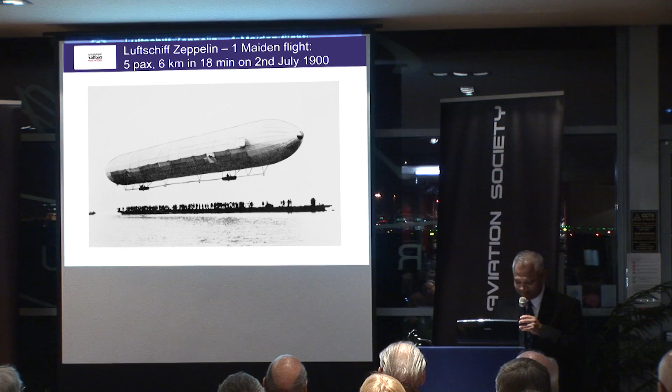Ladies and gentlemen, it's 11 decades of commercial air transport in 2 minutes. Started with airships, which came and went. Biplane airliners came and went. Flying boats came and went. Piston props came and went. Turboprops came, and they have gone for long distance transport, but we still use them for commuting purposes. Turbojets came and went. The idea is why not use the best features of a turbojet with a shrouded propeller, a turbofan, and that gave birth to the fan jets.

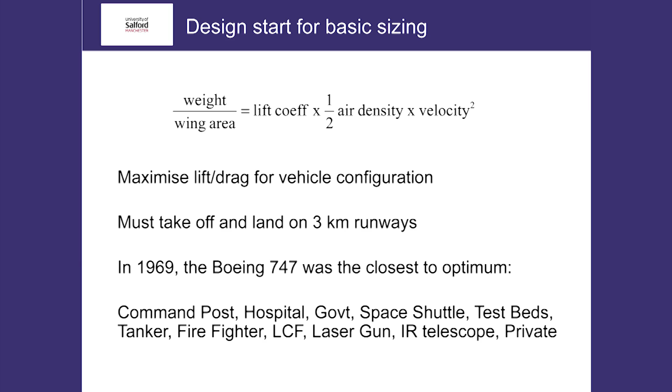So what exactly is the problem? The bigger the plane, the flimsier it becomes, the more it bends and twists. So we have structural distortion problems. By the time I entered the scene, we started using computers to control the aircraft, and by relaxing the stability, you could get better cruise efficiency.

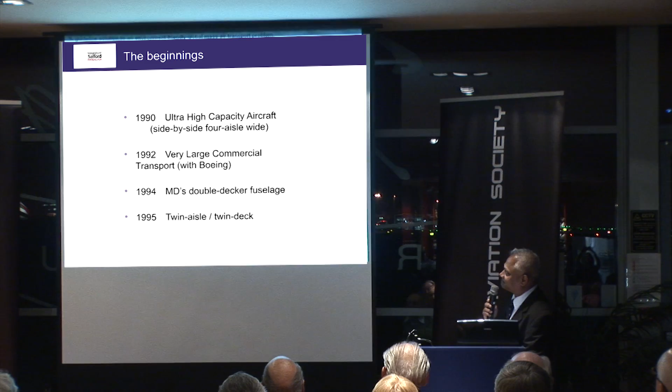When I returned to the university, mainly for my own benefit, I set some classroom exercises so that the students would be able to try and get the best of both worlds, use new materials, and come up with something most efficient for a global transportation system. Now don't worry too much about the next slide, but this is the actual solution to that problem. What's interesting is the last set of numbers the students came up with, if they did the sums right, those numbers are remarkably close to what eventually became the Airbus A380. Very, very close.

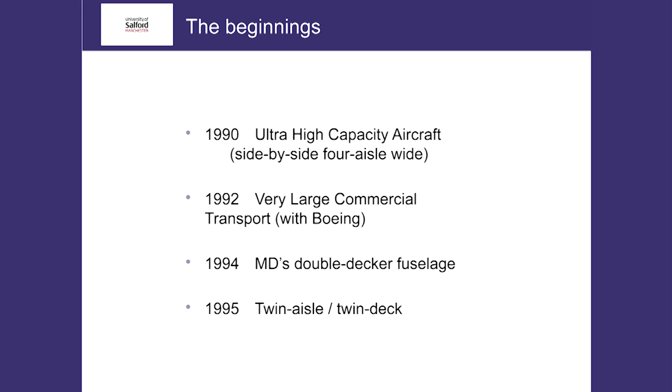So what were Airbus doing at that time? Well, in 1990, I did not know this at the time, but they were actually working on this project. Now, Airbus and Boeing will claim that they do not know each other. Don't you believe them? They did have an affair in 1992, but it didn't last long. In 1994, McDonnell Douglas came up with an aircraft design that looked remarkably like the A380, but unfortunately they went under, which paved the way for Airbus to go it alone.

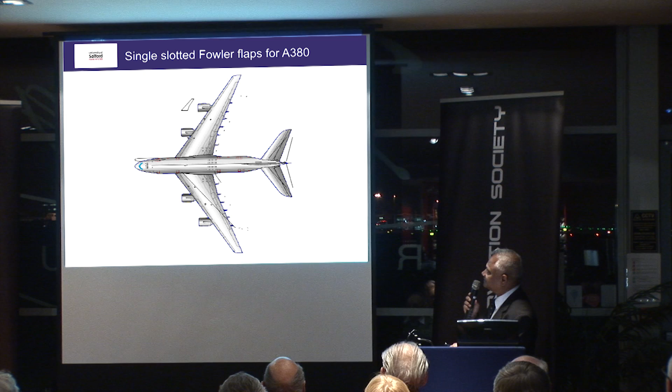So what exactly was the problem? Well, it's the sheer scale of the solutions we are coming up with. The length of the aircraft remained about the same for the given configuration, but it's the wing area - that black line is the outline of a Boeing 747. Its wing area is about 520 square meters. The A380's is about 845 square meters. That's a huge increase, and that was going to bring on an awful lot of flexural problems. The wings were going to bend and twist all over the place. The question is, can you control this using new technologies?

To give another perspective, the root chord of the A380 wing is larger than the length of the single-aisle wing. These are the numbers you see in a shipyard rather than an aircraft factory.

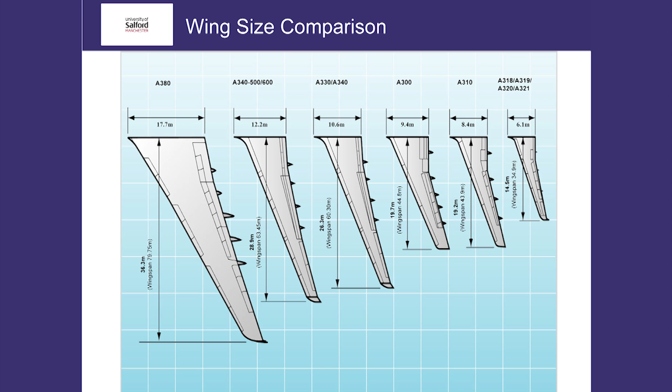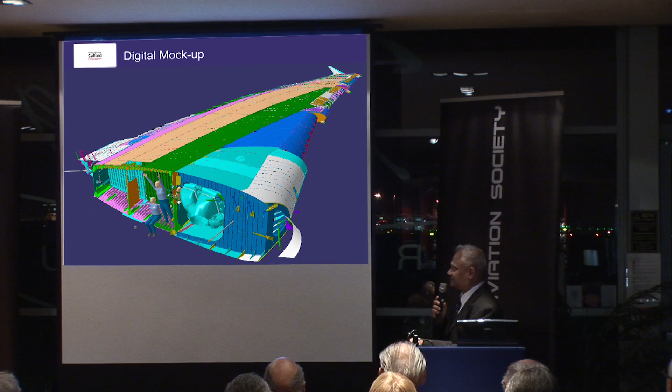Well, a three-dimensional mock-up. When I'm at the Broughton factory, with my height, when I stand at the bottom skin at the root end, I can't reach the upper skin at the thicker section. But of course it quickly thins down as you go along the span. Just for information, the air cycle machines or air conditioning packs are housed in the leading edge of the root section of the wing.

Question is, do we want this particular type of aircraft? The answer was definitely yes. It turns out that regardless of gigantic economic collapses, wars, natural disasters, whatever, world air traffic doubles every 15 years, and we can't go on building new runways and new airports all the time. So the answer was yes, go ahead.

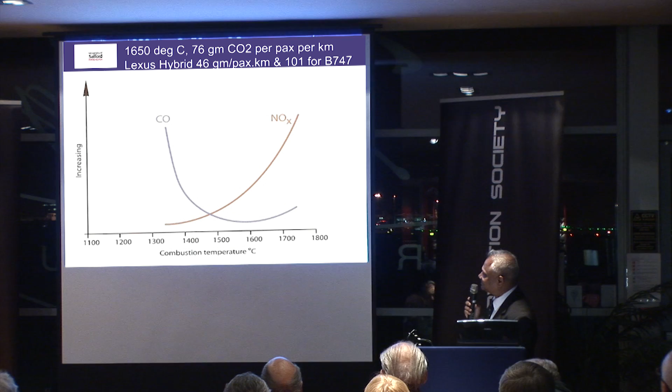We need this aircraft. So there's another problem concerning environmental issues: the combustion temperature. As a general rule, if you burn the kerosene at a low temperature, you run into problems with carbon and carbon monoxide. Nitrogen takes over the problem at higher temperature. For this reason, it was decided to set the burn temperature at about 1650 Celsius, whereby they thought you could get the best of both worlds, and you also had to worry about volatile organic compounds as well.

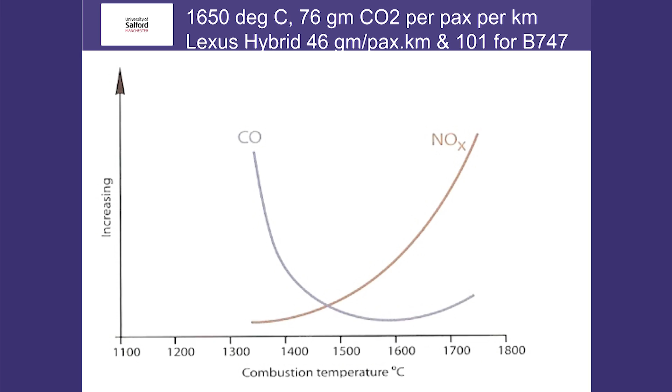Noise: for certification purposes, you place a microphone about 2 kilometers upstream of the touchdown point, another microphone about 6.5 kilometers from the brake release point for takeoff calculations, and a third one about 0.5 kilometer offset from the runway. It's that microphone that will register the greatest noise because the engines are at full throttle.

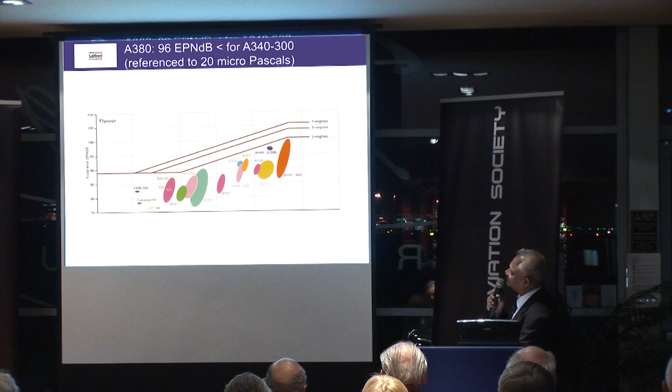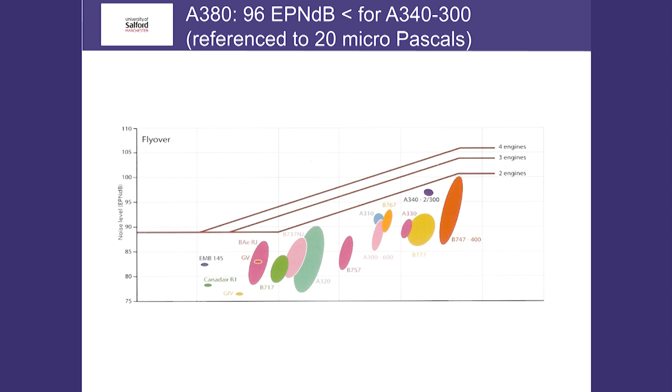If you look at the certification for four-engined aircraft, you're allowed something like 105 decibels. I'm pleased to say that the A380 is a very, very quiet aircraft—it's only 96. EPNdB stands for effective perceived noise in decibels, and we always reference it to 20 micropascal. That's something that's never mentioned when you read the general text.

What about the engine itself? This is a Trent 900. First of all, it's about a third bigger than the RB211, which powers the 747. The Trent 900 is not a Trent engine in the usual sense—the 500, 600, 700, 800 basically share the same aerodynamics. The Trent 900 has swept fan blades; the leading edge is bent, if you like. It's a different set of aerodynamics.

At full tilt, each fan blade's tensile force equates to hanging 90 cars, and the airflow is about 1.2 tons per second. The tips go supersonic, and the high pressure spool rotates in the opposite direction. BPR is bypass ratio: for every kilogram that goes through the combustion chamber, 8.2 kilograms goes around the outside. That's where the majority of the thrust actually comes from.

Overall pressure ratio, just for comparison: those who drive diesel cars, your compression ratio is about 21 or 22 to 1, petrol even lower. This engine's compression ratio is twice that of a diesel car. As for staging, don't worry too much about it, but note this number: the intermediate pressure compressor has 8 stages, and the turbine has a single stage. So that turbine is driving 8 stages of compression at the intermediate shaft level, and the sea level static thrust is about 31 tons.

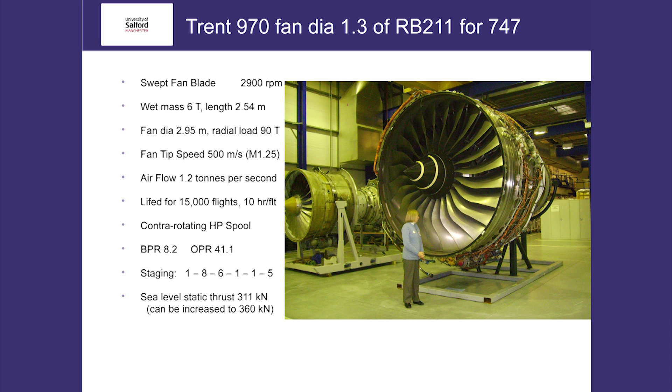By the way, that's my wife standing there. She's seen many of these RB211s—she's a librarian, a cultured lady seated over there. Her first words on seeing the Trent 900 were, 'My God, he's a big bugger.'

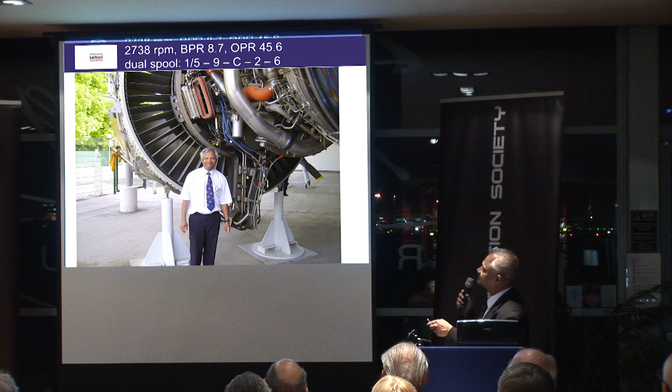The alternative engine is the American engine. It runs slower than the Rolls-Royce engine but works harder. Its bypass ratio and overall pressure ratio are a bit higher, but it's a two-spool engine, and both spools rotate in the opposite direction to the Rolls-Royce fans, because Americans have to be different.

You do as many tests as possible on the ground, but there are certain tests you have to do at altitude and at the right Mach number. For that, the only way is to attach it to an existing aircraft.

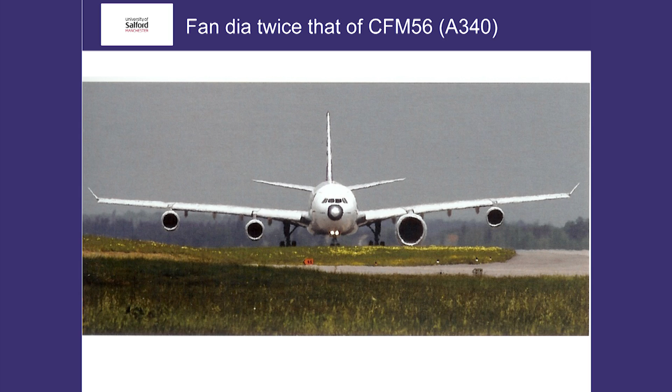The biggest problem here was ground clearance. That engine is about twice the diameter of the CFM56, which powers the A340 test bed. I thought I'd throw that in.

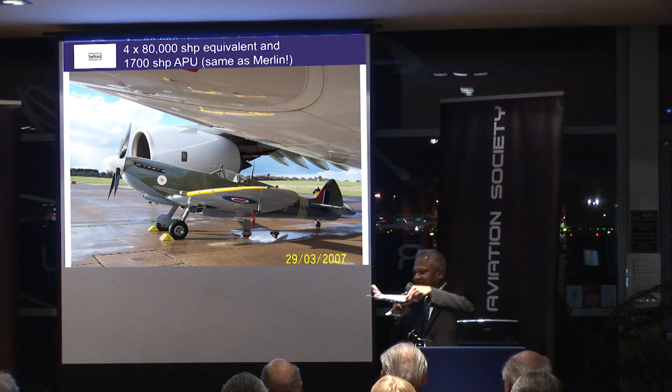In addition to the main engines, which equate to about 80,000 shaft horsepower, at the very back, at the tail cone of the aircraft, you have a fifth engine which is used to run the auxiliaries.

It so happens that the power output of that engine equates to the Merlin engine that powered the four-bladed Spitfire. That is what it takes to keep 440, maybe 500, passengers cool and happy.

New materials: it is predominantly a metallic aircraft, but the whole of the back end is non-metallic, as is the center section of the wing.

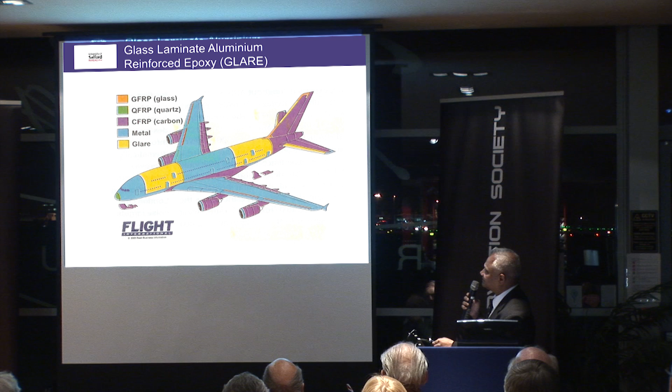The bits in yellow are a combination of the two — a hybrid material made of aluminium sheets pasted onto glass fiber mats. That particular material was developed mainly by Delft University in Holland.

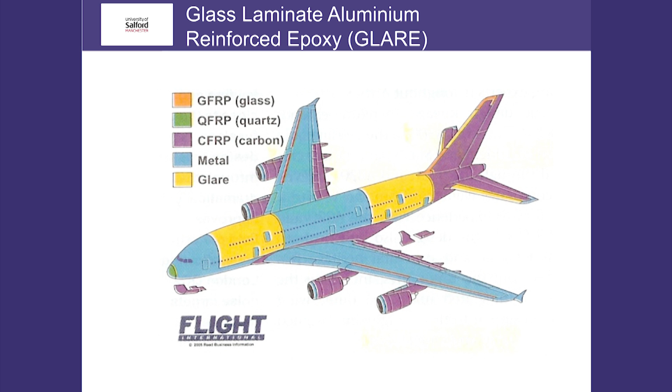We're still not sure whether it's the right thing to do, but hopefully, according to theory, you get the best of both worlds in terms of corrosion prevention, minimum maintenance, adequate strength, and so on.

I had to show this, otherwise my bosses will kill me. These are some of the projects done by my students and colleagues. Lina got a PhD out of structural stressing work. Pirasuth from Thailand, now working for Thai Airways, did a lot of the work on fin and rudder sizing.

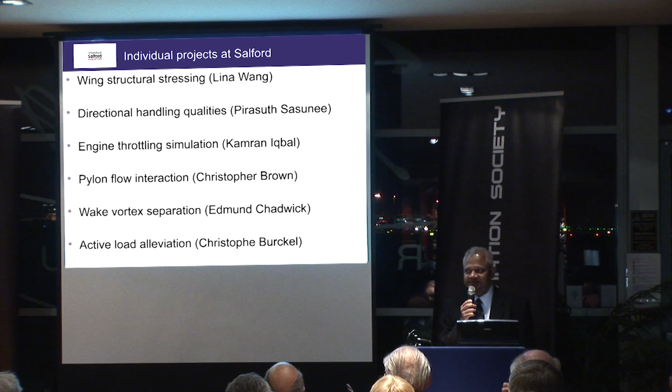That fin is about 25% less than what it was originally, and we had a part to play in that. Engine throttling simulation was done by Kamran.

Kamran is now working on A380 undercarriage systems. Christopher won the Frank Little Trophy doing aerodynamic studies on pylon flow interaction, and he worked for Rolls-Royce after graduation.

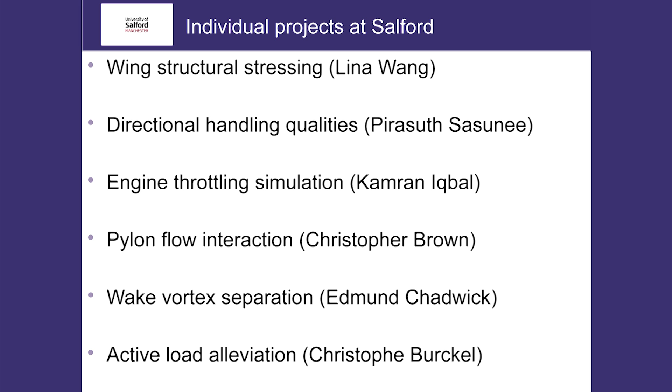One of my colleagues did some work on separation distances, and Christophe from France, very good at mathematics, did some work on feedback control for load alleviation.

The Germans did the asymmetric cases, and when you integrate the whole system, you want to make sure one system doesn't end up fighting the other. So this particular box of tricks makes sure everything is phased in and out instead of jerking the passengers all the time.

Once all that is going on, what you don't want is for the aircraft to get into an unusual mode, so the flight envelope protector keeps an eye on things.

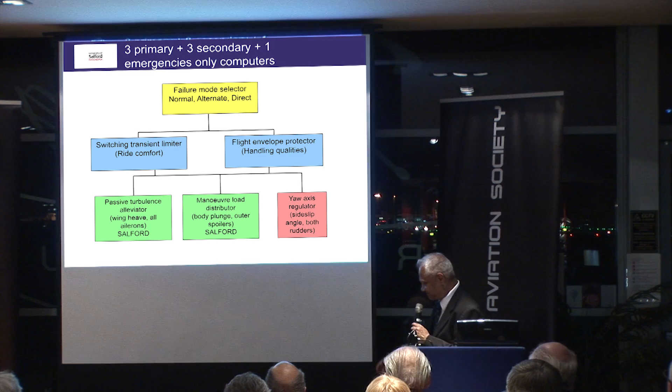If by chance the aircraft begins to approach an unusual attitude or a flight upset condition, it basically asks the transient limiter to back off, and it goes back into control mode, resuming normal functions.

You've got 3 primary and 3 secondary computers. Normally you have the managing director who sits at the top, and if things begin to go wrong, you hand over control to other bits and pieces.

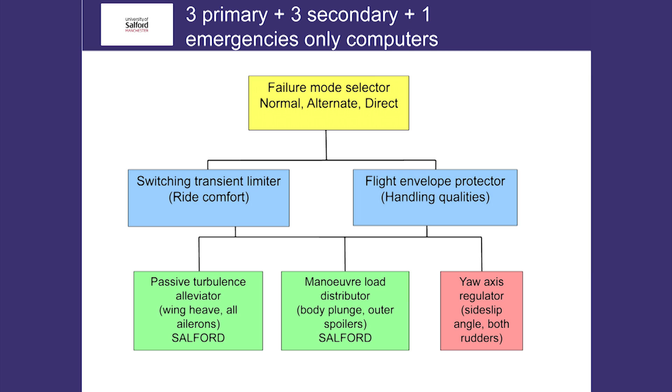Let's just quickly find out what they are. When everything works, a teenager can fly this plane.

If by chance things begin to fail, you find you start losing a little bit of protection. But if you lose all 3 primaries, the secondaries will start running the show.

And even if you lose all 6, you are not at a zero survival situation. What it will do is enable you to hold her steady and level and buy you time to reboot at least one of the 6 digital computers.

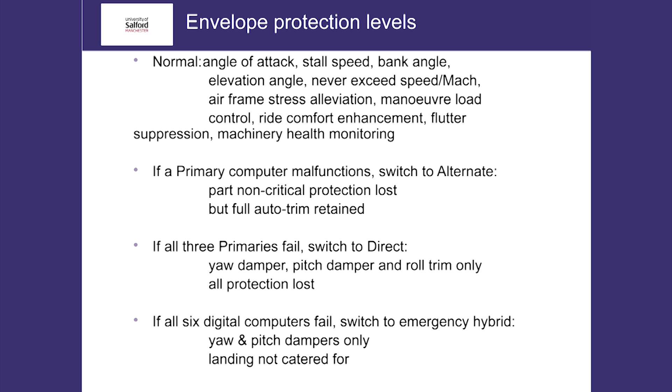Final settings: 560 tons all-up mass. By the way, pressurization involves pumping into the cabin 1 ton of air, which equates to 10 passengers.

That is what it takes to keep the passengers alive in an A380. You also have about half a ton of paint, a grand total of about 68,000 gallons, and it can fly for about 16 hours with a full payload.

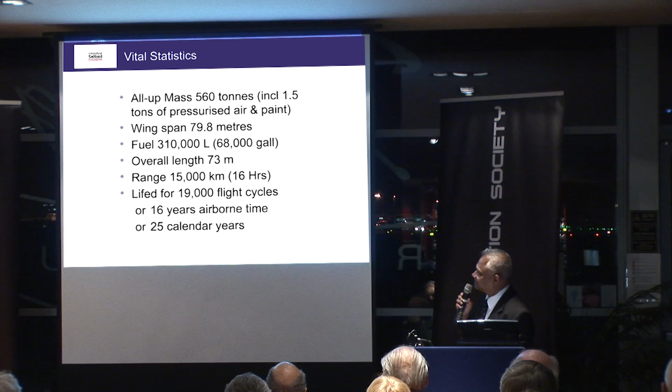And it's built for 19,000 hard landings. If you do 3 hard landings a day, it can absorb the punishment for 19 years.

It can stay airborne for up to a maximum of 16 years, or 25 calendar years — sorry, 25 calendar years is the lifespan. After that, the chemistry of the materials is unknown.

For taxiway width, what you want is the outboard engines to stay above tarmac, otherwise these things will start sucking in all sorts of bits and pieces, including rabbits and rats and God knows what.

So ideally, the width should be about 60 meters plus about 7.5 meters of hard shoulder on either side. With a 75-meter-wide runway or taxiway, you're able to do a U-turn.

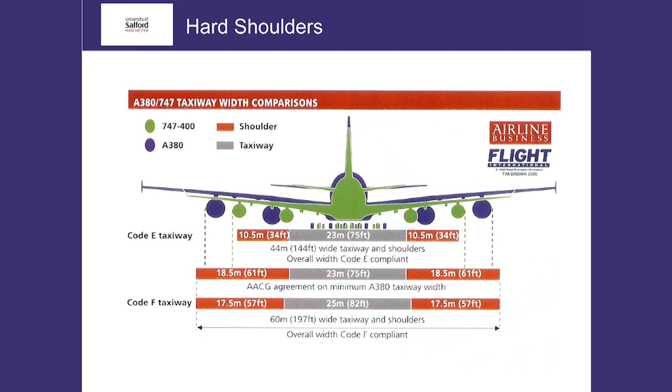The flight deck is pretty much the same as any other Airbus airliner, except for 1 or 2 additional items. This additional display in the corner contains information on airports and so on. It effectively replaces the maps which you have to carry. It also does not have pitch trim controls. They're all electronic. You have the pitch trim and the rudder trim in there instead of the wheels that you normally see in the other Airbus airliners.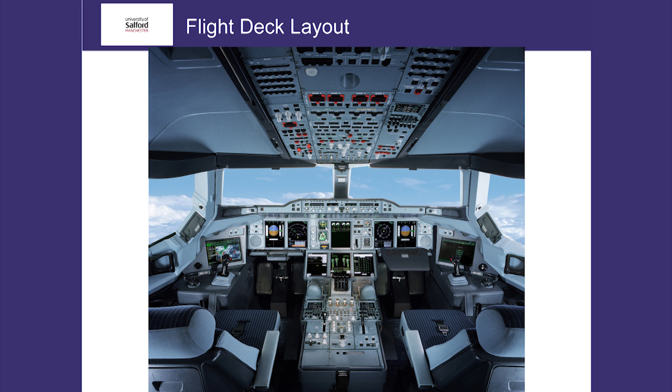You also have loudspeakers. I've never seen loudspeakers on the dashboard before. But having spoken to some of the pilots, apparently it's a very good thing. Otherwise, they had to keep the headphones on all the time. And ladies and gentlemen, this is an electronic, all-digital cockpit. That is why it has got a printer over here.

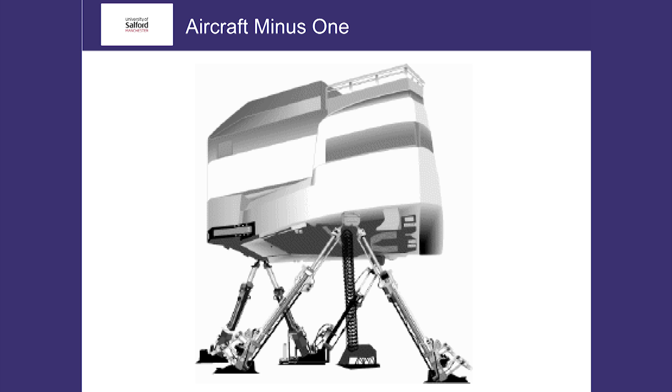If you now place that simulation facility on a robotic device called the Stewart platform, which tries to mimic as much of the 6 degrees of freedom as possible, you basically get a full motion flight simulator. And in Airbus's parlance, this is known as aircraft -1. Let's just have a quick look at the systems on board.

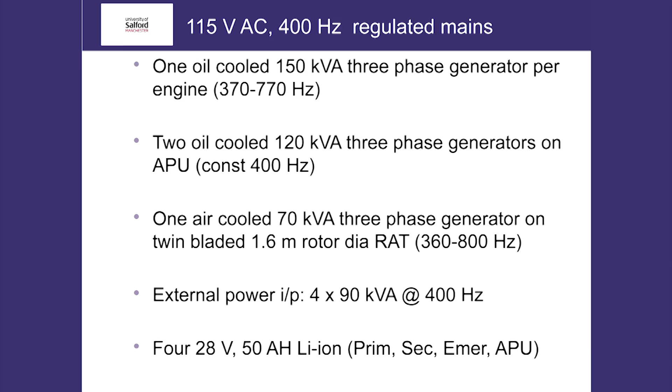You have 1 electrical generator per engine. You also have 2 generators at the back end of the aircraft driven by the auxiliary power unit. In addition to that, I'll see if I can do a juggling act here. On the innermost fairing of the flap track, you have a ram air turbine. Of course, we are engineers, we like to be different, so we don't refer to it as a windmill. That ram air turbine's diameter as it deploys is about the same as my height, and it generates just minimal electricity, about 70 kilowatt ampere. In addition to that, you can plug in external power as well.

And this thing surprised me. There are 4 batteries on board the plane, 3 at the nose section and 1 near the tail section. The capacity of that battery is the same as that in your car. That's it. That's all you got. It's just there to start the APU, auxiliary power unit.

Hydraulics. It's a high pressure system, 5,000 psi. It's got 2 circuits. Normally you have 3 or 4, but the reason you have only 2 is that part of the work is done by electrical actuators. It is predominantly, at the moment anyway, a conventional hydraulic actuated aircraft. You also have electro-hydrostatic actuators. Some people claim that this is brand new technology. It is not. The Vulcan bomber had it 50 years ago.

So you got the electro-hydrostatic actuators. You also have electrical backup hydraulic actuators, which are new. It is effectively a conventional actuator, but with its own pump built in. So if by chance you lose pressure in the circuit, it has its own reservoir and it can act as an independent system. You also have a DC motor. I could not find out what voltage it was on, but I'm hoping to do that later.

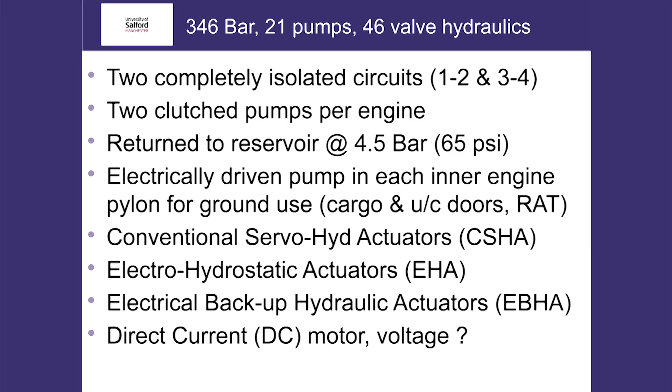The most important part of this aircraft from a control point of view, the bit you do not want to lose, is this variable incidence tailplane. That has got 3 independent systems, 2 hydraulic systems and a DC motor.

I'm also much more particular about the leading edge of the wing, the high lift devices, rather than the trailing edge. If you lose that, at least according to theory, and I have to be very careful because there are at least 2 test pilots in the audience, you are in dire straits. Whereas with trailing edge devices, you can get away with it to some extent. So leading edges have more redundancy, and then you've got hydraulic motors, and the rudders have got 2 electrical backups per control surface. And finally, the spoilers.

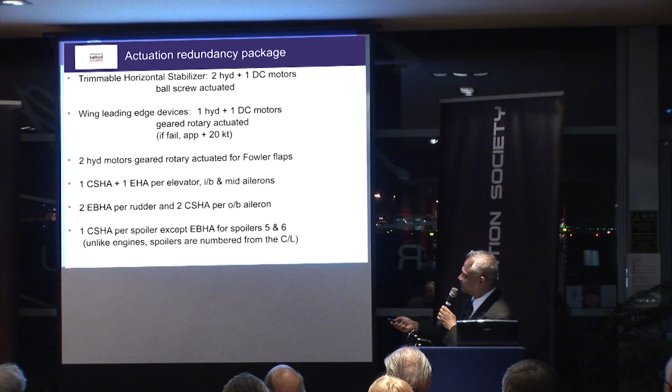That's the other thing. The numbering system varies according to which supplier you're talking to. Engine people do the numbering from port to starboard, so it goes 1, 2, 3, 4. In the case of spoilers, it goes port 1, starboard 1, port 2, starboard 2. It's like football scores. Tire manufacturers go by axle. So it goes wing landing gear front axle first, 1, 2, 3, 4. Then the rear axle for the wing landing gear, 5, 6, 7, 8, and so on. So when they say tire number 17, you have to think which one it is.

Just make a note of this. Spoilers 5 and 6 are the most important of the 8. There's something very special about them because of the way they control the bending and the flexing of the wing.

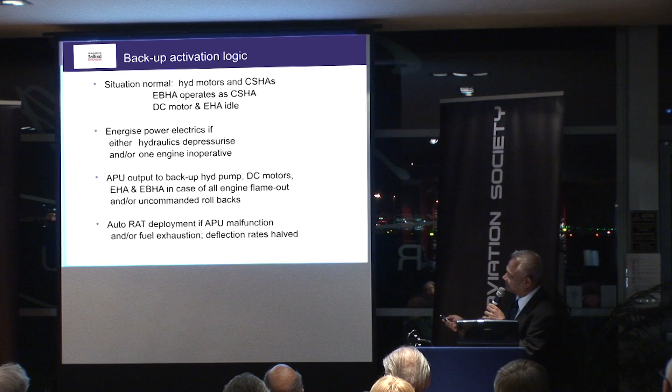When everything is normal, it is primarily a hydraulic aircraft. But if by chance you lose one of the hydraulic circuits or one of the engines starts playing up, it will start energizing the electrical actuation systems. If by chance all the engines start playing up, then the auxiliary power unit will cut in and start pressurizing the emergency hydraulic and the DC motors.

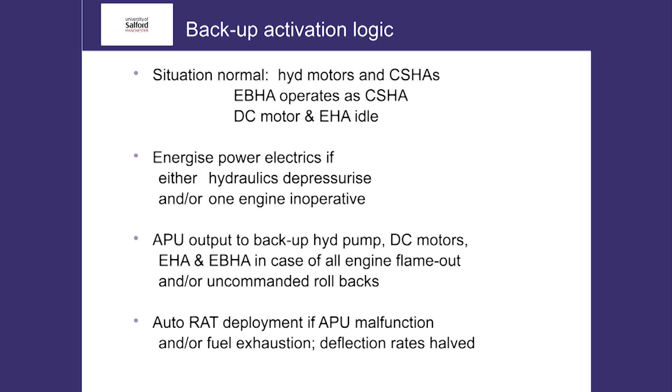If by chance you lose a whole lot, then you have the windmill that pops out, the ram air turbine, and you are now using that energy purely to power the onboard computers, nothing else. You're effectively a glider. You also have a few other features, so I'll skip that bit, I think.

The only thing to remember is that the passenger doors are electric, so they are operable by even the smallest member of the cabin crew. And also the engine thrust reversers are electric as well. As far as I know, there is no other aircraft powered by electric thrust reversers. They're either hydraulic or pneumatic.

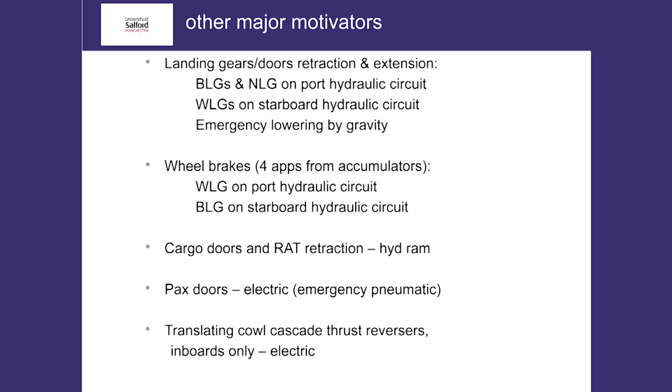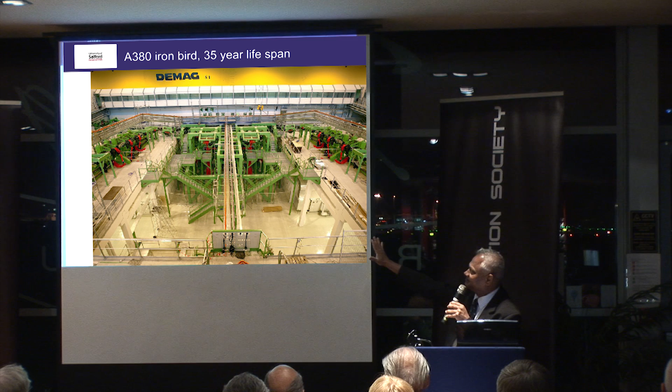So you construct a circuit diagram, hooking up all the bits and pieces. If you then get hold of all the hardware and lay them on the laboratory floor, this is what you'll see. This is in Toulouse. Buried in there is a complete A380 hardware system, and we are standing on a balcony looking down on what is known as the Iron Bird facility. Behind us is the full motion flight simulator, the aircraft -1.

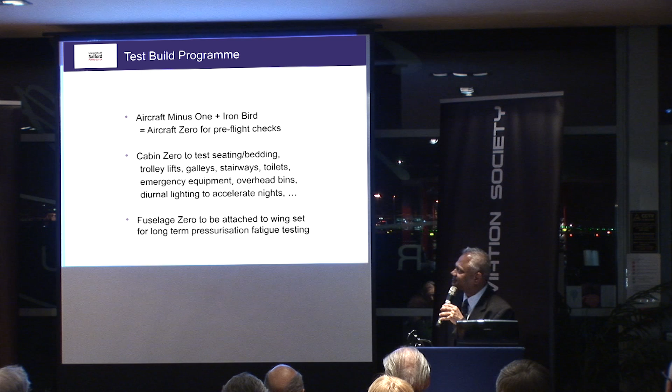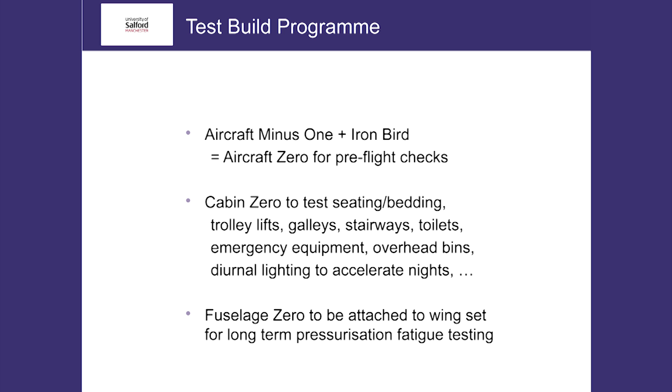In Airbus's parlance, if you hook up the aircraft -1 to the Iron Bird, as the pilots fly the plane, you can see how all the switchgear is cutting in and out, and that is referred to as aircraft 0. That is where you do all your dress rehearsals before every single test flight. You also have a cabin 0. Remember, they had never built a double-decker before, so they want to make sure that they got that right. And also you have a fuselage 0 to do all your pressurization testing.

How am I doing for time? Okay. Right, let's start building the plane.

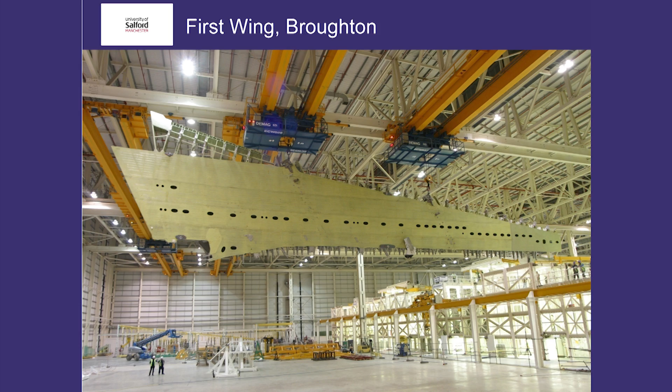You start building it with the center wing box. This bit here. That is French. Rib number 1 is French. Rib number 1 is the one that joins the center wing box to the rest of the wing. This is the first wing coming off the production line at Broughton. The first pair of wings, I'm afraid, will never fly, and you have to break them. The reason is you want to make sure it is failing at the point you predicted that it will.

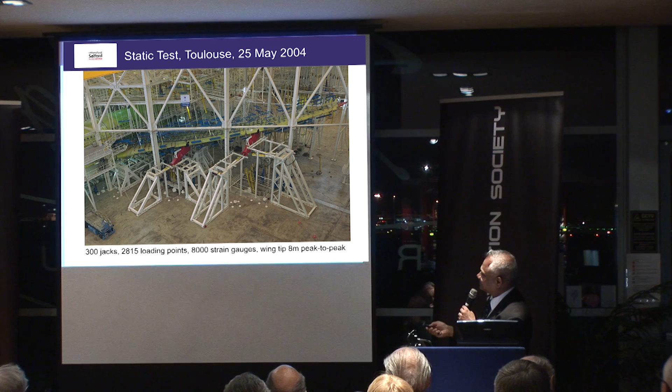So you have all these fancy jacks. The wingtips deflect by about 25 feet, and you also have lots and lots of strain gauges just to make sure that it is bending and twisting the way you expected it to. The second pair of wings will also be punished, but not broken. This one is in Germany.

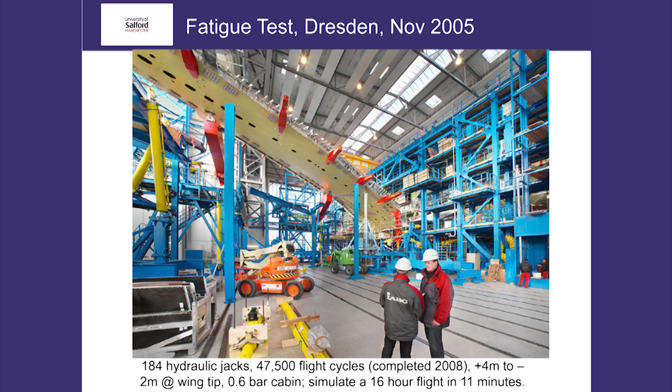What you're trying to do is mimic the flight loads for typical sorties, and you've got all sorts of hydraulic jacks to try and simulate a 16-hour flight in about 11 minutes. That's the same level of punishment. It's not perfect, but it does the job fairly well.

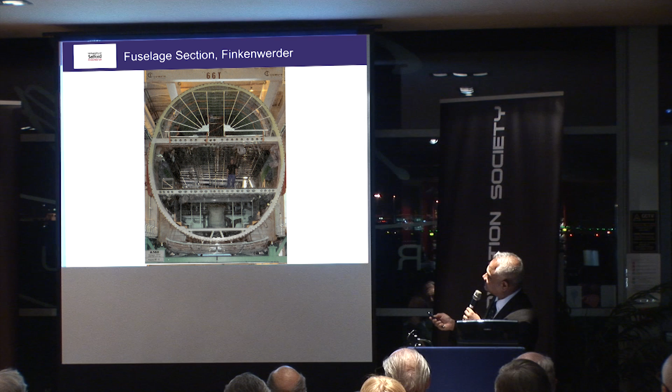Cross-section of the fuselage in Germany. Cargo deck, main deck, and the upper deck. Again, depending on the section, it's a hybrid. It's known as GLARE. It's a sandwich of aluminium and glass fiber. And also the upper deck main beam is non-metallic. It's fiber-based composite. So there are lots and lots of innovations in this aircraft.

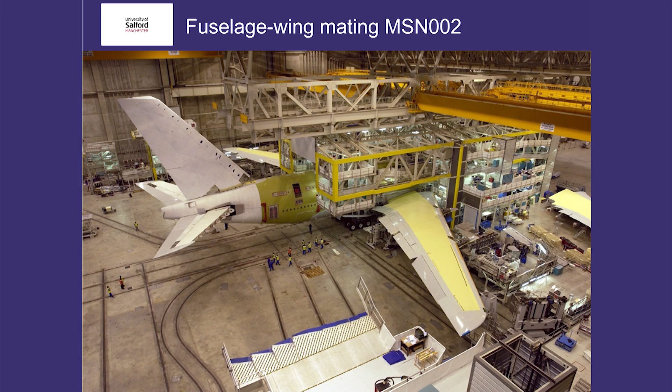This is the first aircraft, manufacturer serial number 002, nearing completion. There's one type of test for which you need the complete aircraft, and that's the ground vibration test. This is not the first aircraft that was to fly, because you had to conduct some oscillation tests, and that's typical of the sort of shaker we use. I used to love doing these when I was a postgrad.

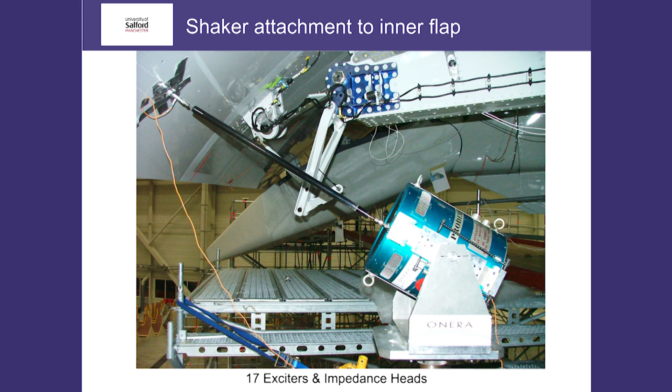We had these actuators basically vibrate the whole structure at prescribed frequencies and amplitudes, and to pick up the outputs, we use these accelerometers. These are tiny devices with piezoelectric crystals, and the idea is that as they compress and expand, they generate a charge in coulombs, which is what you're picking up. And what we're trying to do is make sure that it's vibrating the way you thought it was going to shake. It takes about 6 weeks of testing to get all the results. This is the actual aircraft undergoing testing.

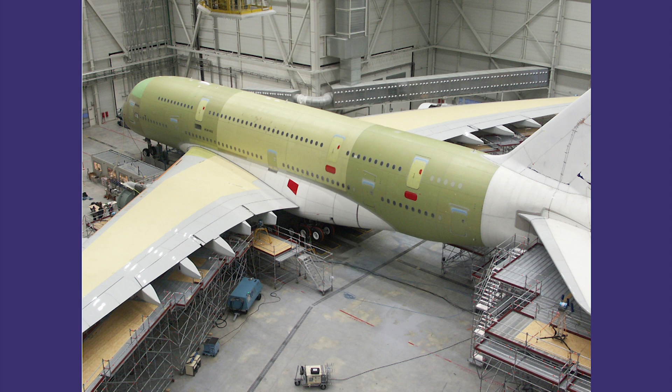I thought I'll throw this in because the bits in red are the compartments which hold the slide rafts. For the main deck, the slide rafts are at the bottom of the doorway, whereas for the upper deck, they're actually below the doorway. This is to make sure that the drop isn't too much when you ditch on water. But for me, the most fascinating one is this one here, the belly of the aircraft. That, on deployment, creates a balcony walkway with a slide facing backwards.

Now, what are the conditions? Well, I'll let you read this for about a couple of minutes. Those are the conditions that have to be met when you conduct an evacuation trial.

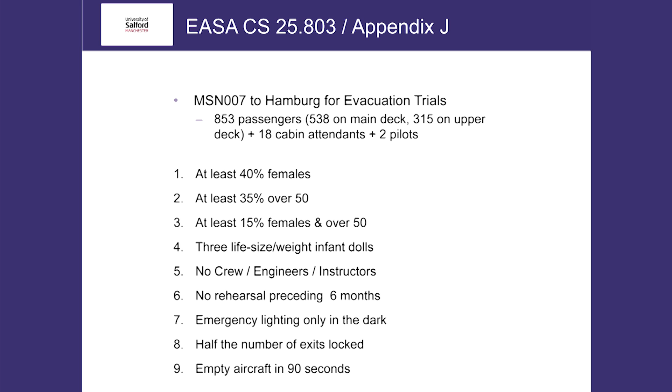So, I'm delighted to say that all 873 human beings exited the aircraft. However, there was one passenger who did break his leg. It's quite a dangerous test during this trial, and this is the scene after the evacuation. All the chutes are deployed nicely, and that's the center one I was talking about, the balcony walkway with the slide pointing backwards. However, this one is not a raft.

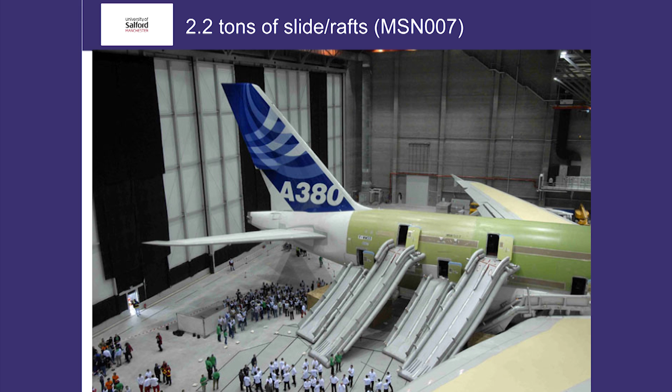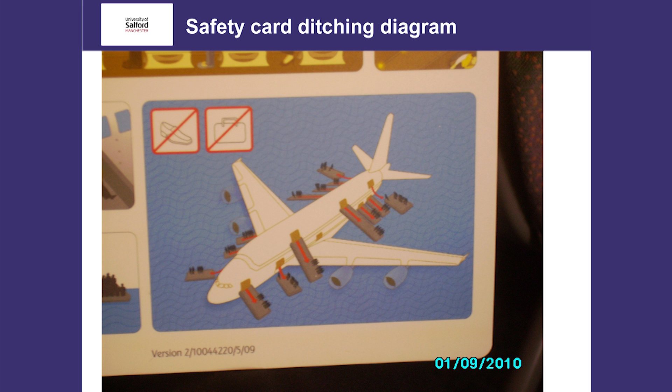So if you have to ditch on water, that particular slide is not allowed to deploy, and this is reflected in the instructions given to the passengers in the safety card. As you can see, that door remains locked. There's no diagram, there's no raft coming out of that diagram.

Whilst all this is going on, you have got the MSN 001, which is going to make the maiden flight. The test pilots are doing their dress rehearsals. They actually wear parachutes and helmets, so you never know what's going to happen. And the defining moment came in April 2005.

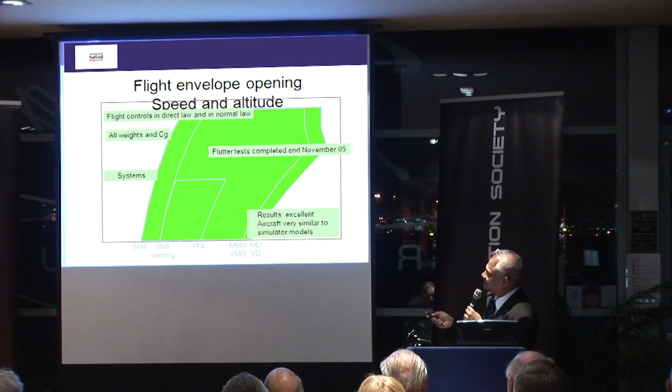So maiden flight takes place somewhere here, and then over the next several months, years perhaps, you try and keep on pushing the envelope. And one of the borders you do cross is this stall. There is an awful lot of stall tests on the A380, so you momentarily go into that region, but of course you know how to recover, so you come back in.

You can't get up there anyway, this is engine limited, but this boundary is forbidden. In fact, the aircraft shakes so much that you just go near it and then you keep on extrapolating and you try and make sure that the aircraft limits are fairly well known at that point.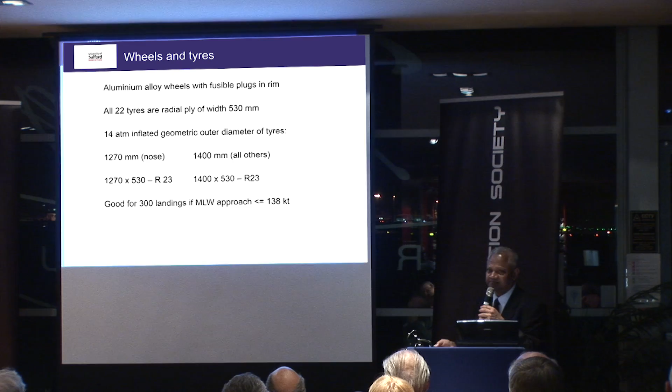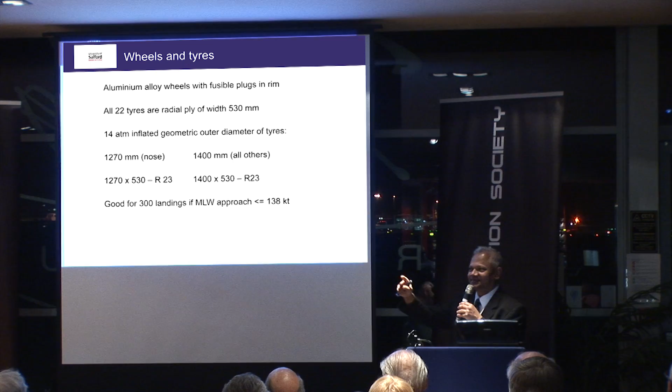Also, no one can beat the tyre manufacturers when it comes to mixing units of measurements in their product specification codes. What this means is the 1270 and 530 are the diameter and the width of the tyre in millimeters. R is radial ply construction, and 23 is the diameter of the wheel in inches, just to make life really exciting. And if you use the aircraft in accordance with the manufacturer's instructions, you should hopefully get about 300 landings at the typical landing speeds.

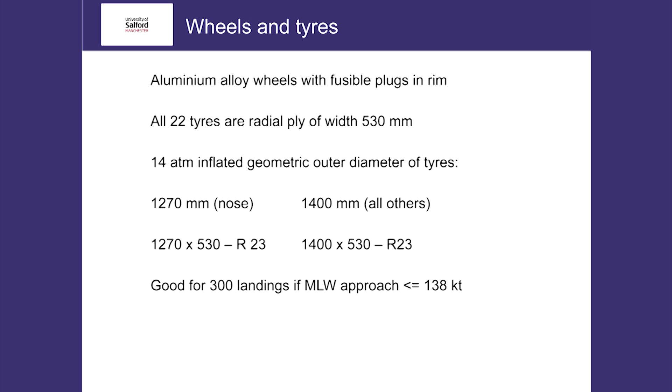In addition to all the other tests, you also do this particular test, this VMU, minimum unstick test. Alan Foster and Alistair McDicken will be very familiar with these things. What you do is you attach a tail skid and you pull back on the stick prematurely. At this point in time, the aircraft has got enough aerodynamic force on the tail end to get her to rear up, but not enough lift on the wings to get off the ground. And what you're looking for is to try and work out the speeds at which this is happening.

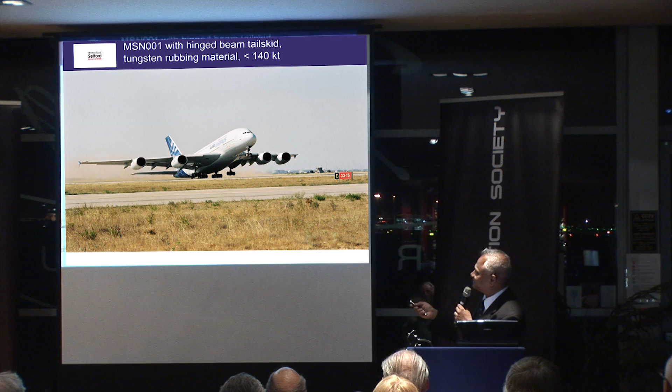And you can see the wing landing gear is airborne, so is the nose landing gear. She's riding on the body landing gear at the moment. What should have happened is she should have just lifted off gently. Instead, they got the sum slightly wrong, and the aircraft pivoted about the skid and started scraping the tail. There was a fair bit of damage, but things were repaired, lessons learned, and that problem was sorted out fairly quickly.

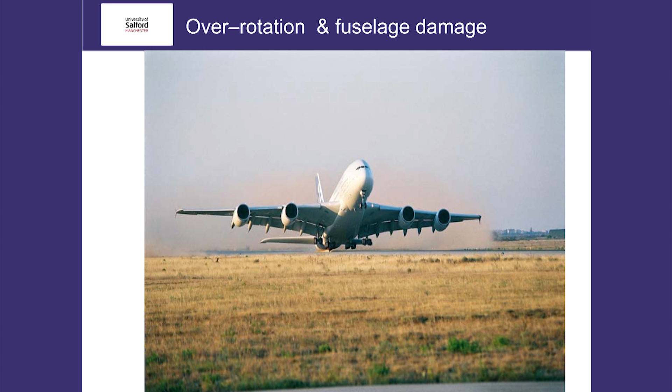Brakes: you've got 5 discs per wheel, and they're non-ventilated, unlike the ones in your car, because they'd deform too much. Despite what they say, even carbon brakes lose a lot of efficiency when they become very hot.

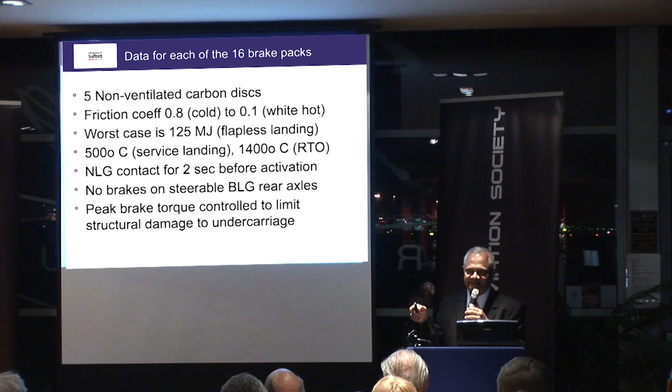Worst case scenario isn't a rejected takeoff, it's a flapless landing. When you do the sums with half mv squared, because you're squaring the velocity, that number turns out huge. That particular test isn't carried out on the aircraft itself, it's carried out by the undercarriage manufacturers. But the rejected takeoff test is carried out, we'll come to that next. The typical temperature you're looking at is about 500 Celsius on landing, and then you have fancy control systems which try to make sure there isn't too much structural damage when you apply maximum braking.

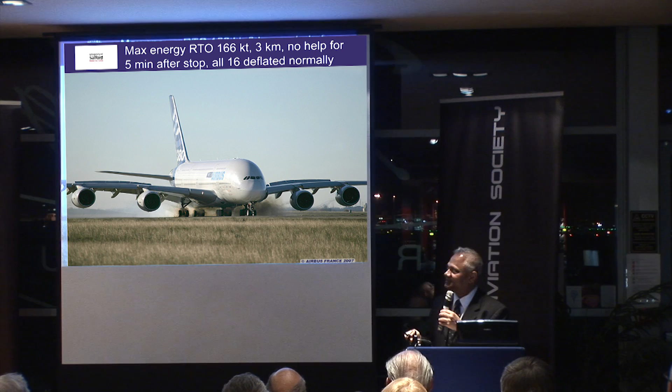This is the rejected takeoff test. What you do is load the aircraft to maximum takeoff weight, accelerate to about 166 knots, and then without the use of thrust reversers, bring the aircraft to a halt using just the aerodynamic surfaces and wheel brakes only. The worst thing, and this is where I feel very sorry for the pilots, is they just had to sit there for 5 minutes whilst these tyres are burning right underneath the tanks full of fuel. They just have to trust that the engineers got their sums right. The idea is that it's deemed it will take 5 minutes for the fire brigade to reach the aircraft after an emergency. Also, the body landing gear has got 3 axles, and the rearmost axle does not have brake packs fitted on the current model, so there are only 16 brake packs in the main landing gear.

So 5 A380s took part in the certification trials over about 1.5 years, went all over the world, plenty of flying, and perhaps one of the most spectacular crosswind landings was at Keflavik in Iceland. It's claimed the crabbing was so much on final approach that spectators in the terminal could see the far side of the fuselage until the last minute, when it aligned with the runway.

Lots and lots of stall tests, most impressive, all sorts: power on stall, power off stall, asymmetric stall, flaps on stall, slats on stall, you name it, they did the whole shooting match. On one occasion they managed to land an A380 at 592 tons, a world record, but they're keeping quiet about it because it's likely to be broken again in the not too distant future.

In terms of trying to break the navigation systems, one of the most spectacular flights was from Johannesburg to Sydney, flying all the way to the magnetic and true south poles. The idea was that from the true south pole, no matter which way you look, everywhere is north. As expected, the navigation system did throw a wobbler, but as soon as I turned left, it came up with a message, reacquired the coordinates and said, 'I know where I am, I'll get you home.' I'm delighted to say this was the first time ever the airworthiness certificate was awarded by the Americans and Europeans at the same time.

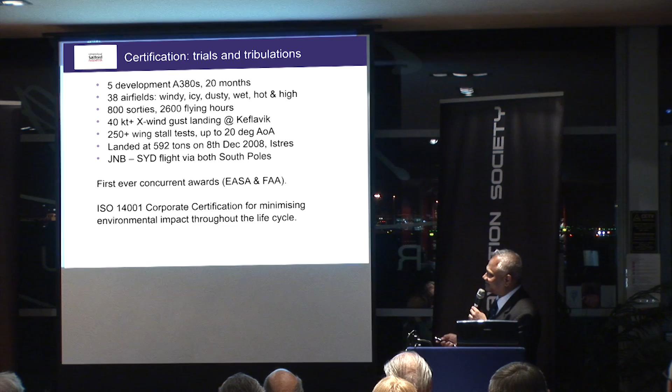Airbus asked me to put this in: this concerns exhaust emissions, noise signatures, recyclability of materials after disposal, etc. Apparently she's a very, very green machine, and I understand this was the first aircraft to qualify on ISO 14001 on the first attempt.

So what happened to the 5 test aircraft? Two of them have been retained by Airbus to develop future derivatives. The one on which you saw the ground vibration test being conducted, apparently a very rich Arabian gentleman has requested for it to be kitted out as a flying palace.

The other two, I think they ended up with Emirates Airlines, but I'm sure the spotters here will correct me. MSN 003 did not take part in the certification trials, but she was the one used to test that she's ready to receive babies, children, disabled people, pets, etc.

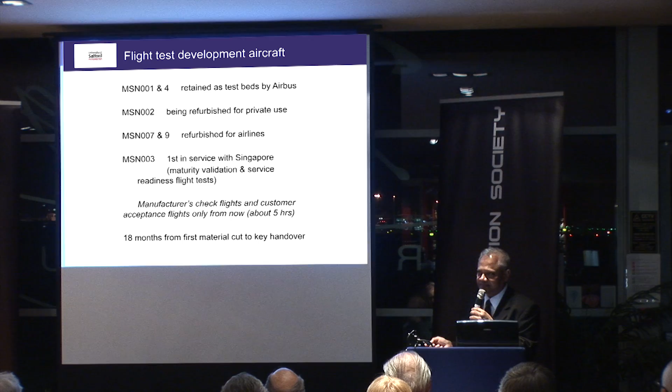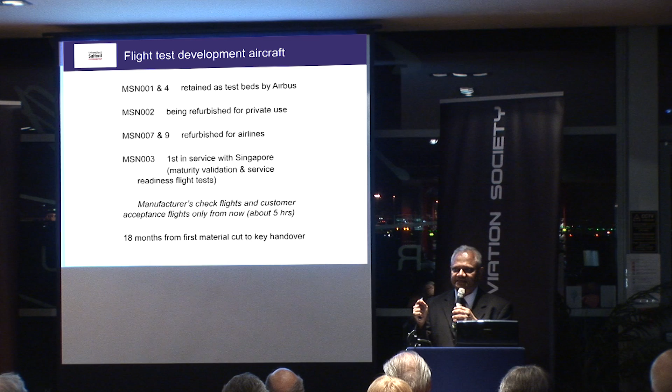Today, when the handover takes place, the manufacturer conducts a flight test lasting about 2.5 hours, and then the customers do another 2.5 hours. From the initial delivery of the billets into the factory to change of ownership, it takes about 1.5 years. By the way, they still refer to this as the key handover at Toulouse.

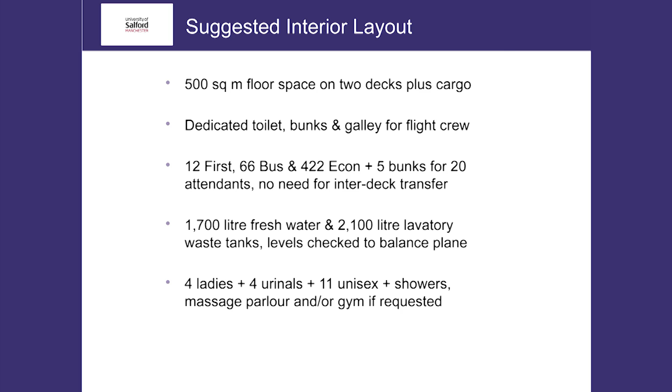What we're going to do is have a quick look inside the aircraft. This is just a recommendation to give you some ideas of the possibilities of interior decorations as well as furnishings. We are going to enter the aircraft through the frontmost door of the main deck, and as we turn to our right with the flight deck behind us, you'll see the straight stairway, which we'll take up onto the upper deck on the front end.

If you want, you can have a conference area for business folks who want to do some work en route. You can also provide seating for them, six abreast with plenty of leg room. If you want to see how the peasants are faring in steerage, you can go to the back end of the upper deck, and if you want, you can have a pub right to the back end of the upper deck.

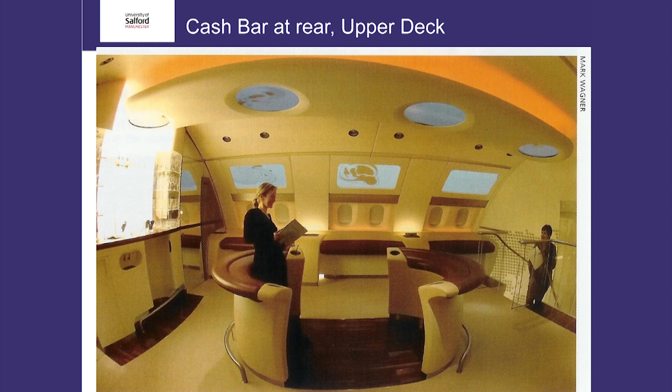This is interesting: within two months of the maiden flight, she performed in front of the general public at the Paris Air Show. It's a week-long show, and she flight demonstrated every day, bang on cue. Spare a thought for the engineers who must have worked extremely hard every night to make sure she was available at the right time.